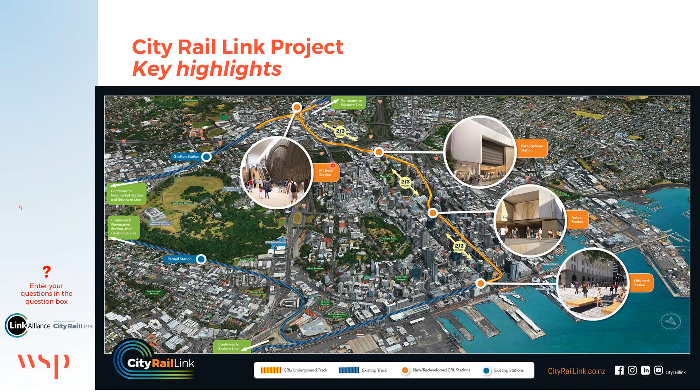This contract is being delivered by the Link Alliance, which is CRLL, Downer, Vinci, Soletanche, AECOM, WSP, and Tonkin and Taylor, with our key partners, Auckland Transport and KiwiRail, and the sponsors from the New Zealand government.

Drop down into a little bit more detail of the North Auckland Line. So this is the North Auckland Line. We're now looking the other way up. So the city centre is up here to the top of the page. We've got a live rail line which is approximately 1.2 kilometres long, with the only link out to the west of Auckland. It's currently twin track with only Mount Eden Road. This intersection here is the only one that's grade separated. The other road and pedestrian grade separations haven't been undertaken yet.

To enable the train frequency and operational capacity that we just mentioned requires full grade separation, and we're creating a link up here into the tunnels and putting in 4 tracks in these locations where there were once 2. So that's in the east-facing connection here to this side, and the west-facing connection here. And so this is the Mount Eden station site that I mentioned on the previous slide, and this is the tunnel portal heading up towards the north.

As a brownfield site, there's obviously a very constrained corridor, lots of existing roads, utilities, and then all of these existing buildings along the route. So one of the tricks to this is how to stage and build the rail line whilst minimizing disruption to the network. And an integrated rail and civil solution was required to enable this.

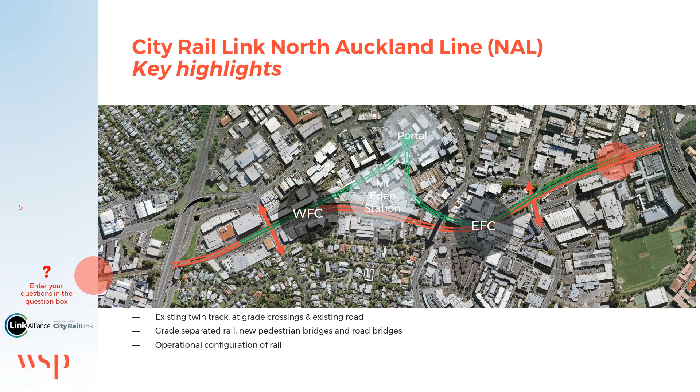Thanks, Dave. So just following on from that scope summary by Dave, I was going to discuss the construction staging in a little bit more detail. So hopefully the next slide comes up. Yep. Using some snipped images from the Fuzor 4D model that we've developed, basically we can take our federated 3D BIM model, and it's been linked to the P6 program. So we've taken a few snips from that to show in white each stage of the single line running alignment, to try to explain that in a bit more detail.

As Dave has mentioned, predominantly we are doing track lowering into a newly formed trench to provide grade separation below the road network and to create the connections from both the east and western sides into the CRL tunnels. So we've undertaken that in 2 main single line running phases, including the reconfiguration of rail systems for each operational configuration, which has involved a bit of complex consideration around constructing civil infrastructure works while still maintaining system integration.

What you can see here on the screen is the main single line running alignments in white, and I'm going to step through it in order, basically. The first stage was to decommission the existing MC10 track. So what you can see here is that that track is gone, and the white line is the single line running on the MC40 track. That allows us to create room on the northern side and to construct the civil structures and the top-down grade separations in the east and west that form the 2 CRL connections.

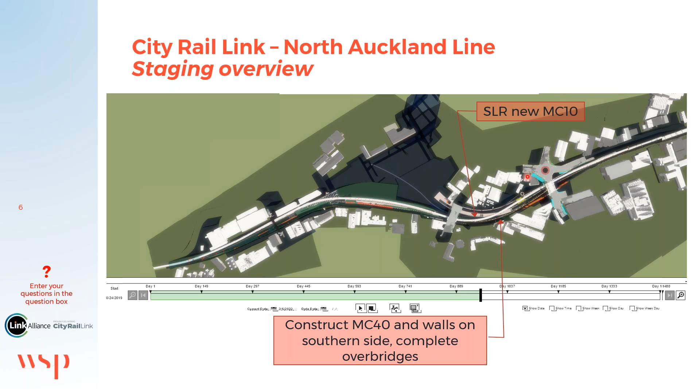We commission that track, we decommission the MC40 track, which was there before, and then we construct on the southern side of the boundary whilst also excavating beneath those new grade separation structures to form those CRL connections. Finally, we then commission the new MC40 track, and we also commission the MC20, 30, 50 and 60, providing those connections to the CRL tunnels themselves.

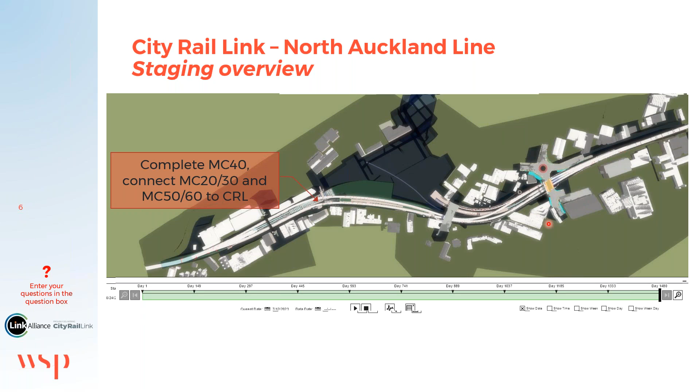All around this work happening, we've also got offline, off-corridor roading works to be done, including new footbridges at level crossings, a newly constructed grade separation at Normanby Road, and a top-down road bridge at Mount Eden.

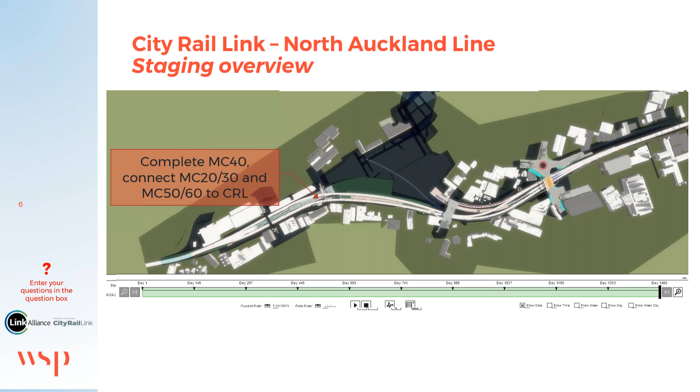Okay, so following on from that, I'm going to move on to focus on the east-facing connection area and talk through the staging in that area in a bit more detail. So this is another view from our BIM model, and what we'll step through is 3 main configurational phases of this area.

So just to get your bearings, we're looking west. You can see Mount Eden Road. You can see the existing Mount Eden Road bridge with the road over rail bridge in the top left corner. That's where the 2 existing tracks were running, and now we're currently operating on one single line, which is that track in white there.

So essentially we've been doing a whole lot of top-down construction whilst running on a single line running strategy through there with the hoarding in place. And that's involved construction of a new bridge on Mount Eden Road to allow the new CRL connections, the MC50 and 60 lines, to pass underneath Mount Eden Road.

And that's been formed by top-down D-wall structures, which have been done in 2 phases whilst we shift traffic back and forth. We've also got some contiguous bored pile walls on the north side, which allow that track lowering some 6 meters below that existing ground level there. And then we've got the major grade separation structure, which you can see there with the propping between 2 diaphragm walls, which facilitate top-down construction of that grade separation.

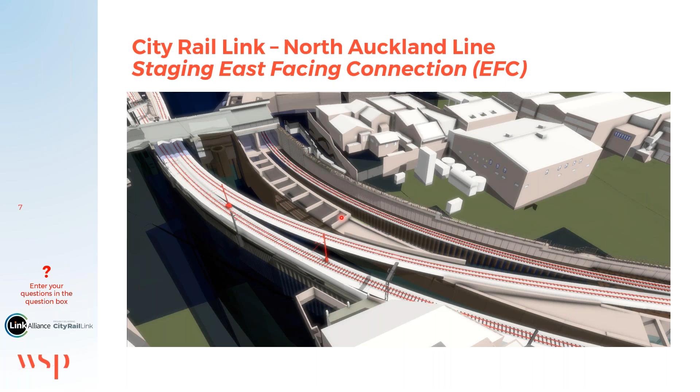Thanks, Daryl. So I'm just going to quickly run through a more detailed sequence in the west-facing connection. So this is the existing lines we've got. This is the new MC10 that we're constructing. And one of the areas I want to just focus on is the western grade separation. So in this area, it's pretty tight. So there's exterior walls and interior walls.

So the final solution is looking like this. We've got the two outside tracks are high and the middle tracks are low. So there's a retaining wall on the outside, one on the inside, one on the inside, one on the outside again. But the key to unlocking the sequence through here has been around the western grade separation structure. So I'm just going to talk a little bit more about that.

The western grade separation structure is carrying this MC10 line, and we've worked very carefully to make sure that the structure can be constructed offline, away from this existing line, which is staying in its current position. There's been no changes to that to minimize that operational change. So the solution we've gone with is a top-down solution. You can see the piles, and we've got a spine beam running down this structure, kind of ladder type scenario with props, and then a trough that's carrying the MC10 going across the top.

The two-stage solution you can see as we flip between here and here, the rest of this structure is built in the second stage, and this portion here is left out. So there's been some very careful coordination geometrically to make sure that all of this fits together and to minimize the amount of temporary works.

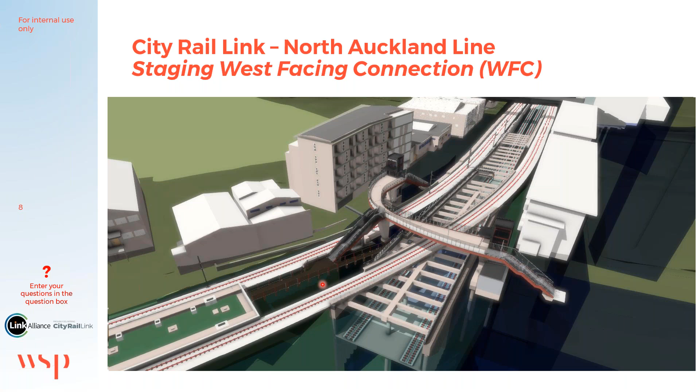And you can see this is looking the other way. So this is looking from up here, looking down towards the tunnels. And you can see the shape here of the existing lines running live, and then you can start to see the shape of the trough being constructed. So there's pretty cool videos out there if you want to have a look at that. So that's us sorted.

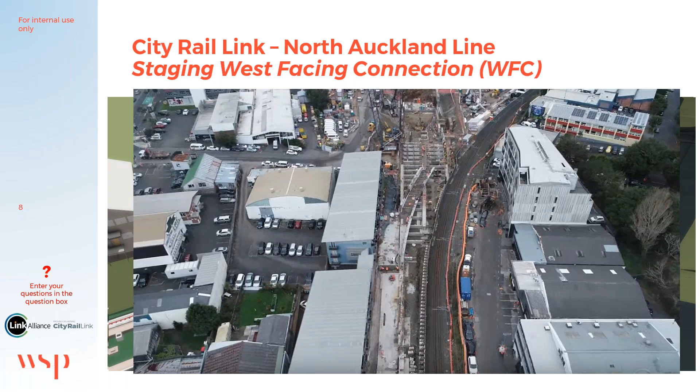Just very brief highlights on the North Auckland Line. As you can see, it's quite a complex brownfield rail environment, trying to maintain live road and rail throughout. We've worked together as an alliance to have a design and construction that's optimized to try to minimize that disruption, which has required some integrated rail systems and civil solutions. And you can see some of the stuff that we've put out there on these slides. We've been using quite a lot of 3D and 4D information to support that work, and there's some other talks available on that that have been given in the past.